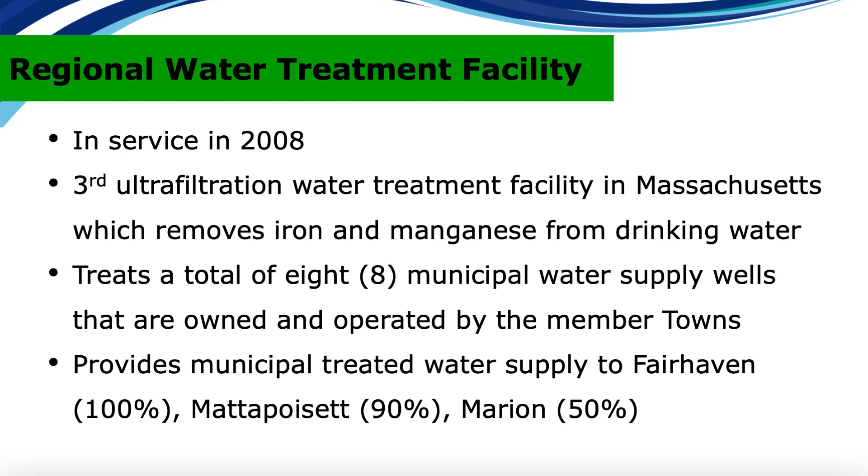It's actually the 3rd ultrafiltration water treatment facility in Mass, and the ultrafiltration system removes iron and manganese from the water. There's a total of 8 municipal wells that are owned by the respective towns. Fairhaven owns 4, Mattapoisett owns 3, Marion owns 1, which they share with Rochester. 100% of Fairhaven's public water comes from the district water treatment plant, 90% of Mattapoisett's, and about 50% of Marion's.

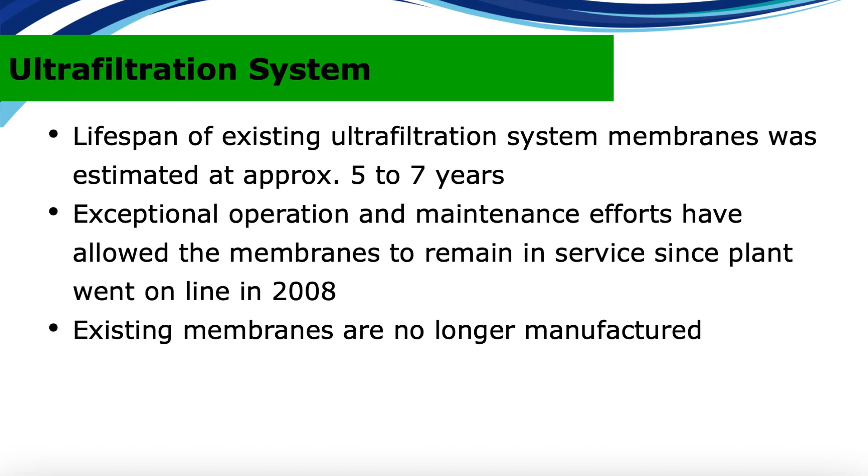The current ultrafiltration system lifespan is approximated to be 5 to 7 years. Through exceptional operation and maintenance efforts, the membranes at the plant have survived since the plant went online back in 2008. The existing membranes are no longer manufactured. As we have a state permit to withdraw the water, and they don't make the filtration system anymore, in order to change the filtration system at all, we had to get state approval. In order to get state approval, we had to have a pilot study done and duplicate the full-scale operation, which we did with a new system.

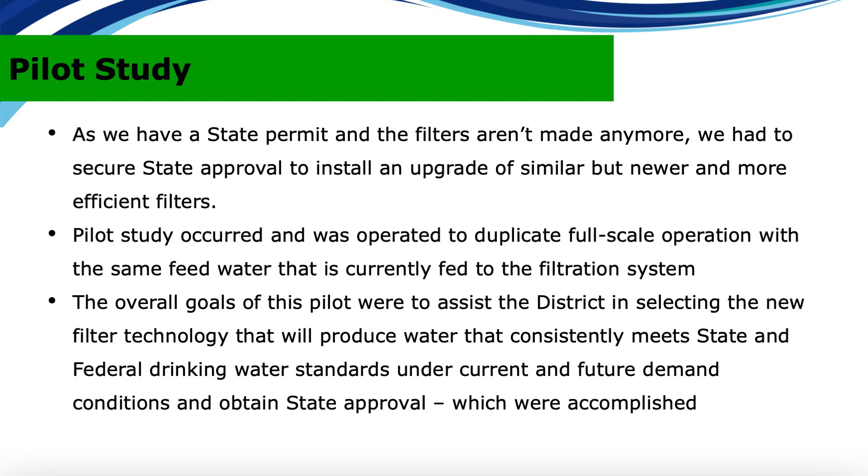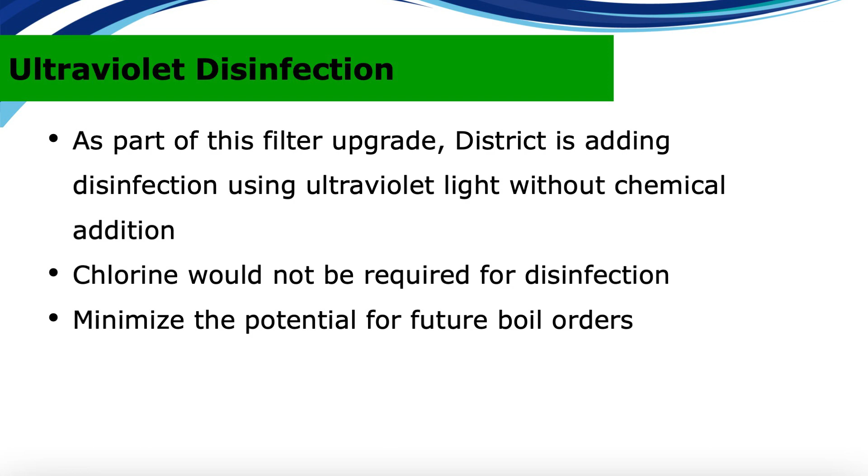With the district obtaining state approval for the new filter technology, as well as approval for the disinfection addition, the next step was to secure funding at the 3 respective district member town meetings, and that took place back in 2022. The total budget is estimated to be $7.2 million. The capital cost by town based on consumption: Fairhaven's allocation is just shy of $4.2 million, Mattapoisett's $2.3, Marion's a little bit over $700,000.

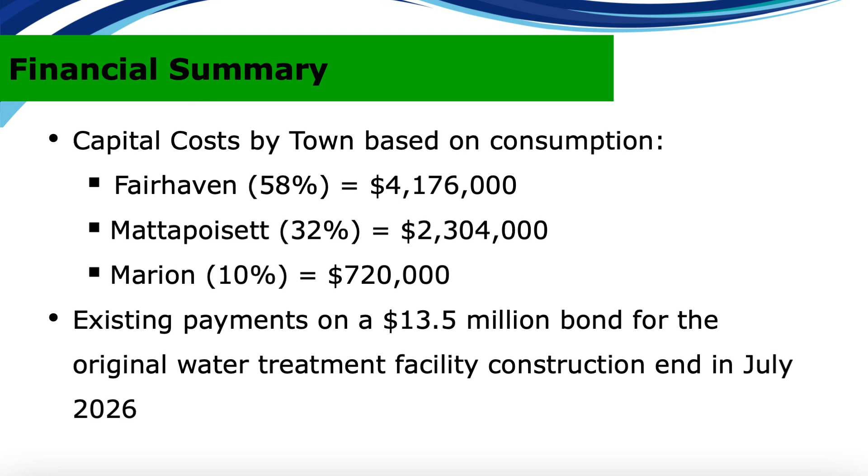Again, the water is safe, but due to the filter lifespan and the fact that the state, ever since the boil, requires us to add trace amounts of chlorine, any minimal turbulence results in the resuspension of particles, and that's what causes the water to be discolored sometimes. The iron and manganese, which is removed, is resuspended again at times.

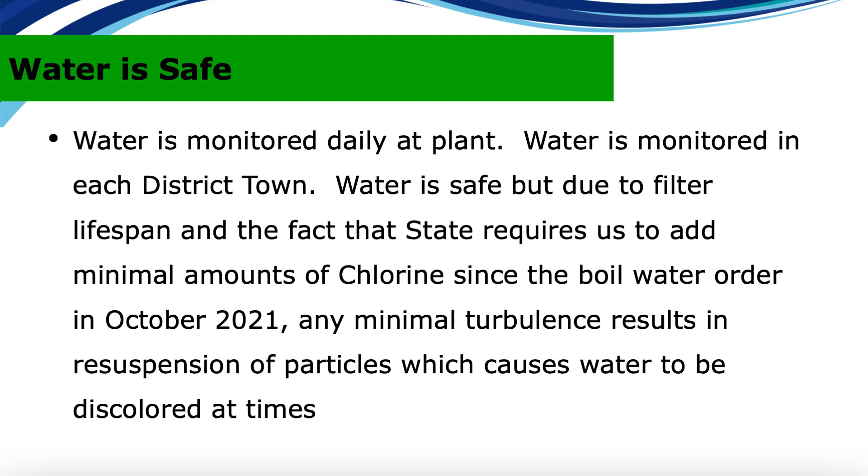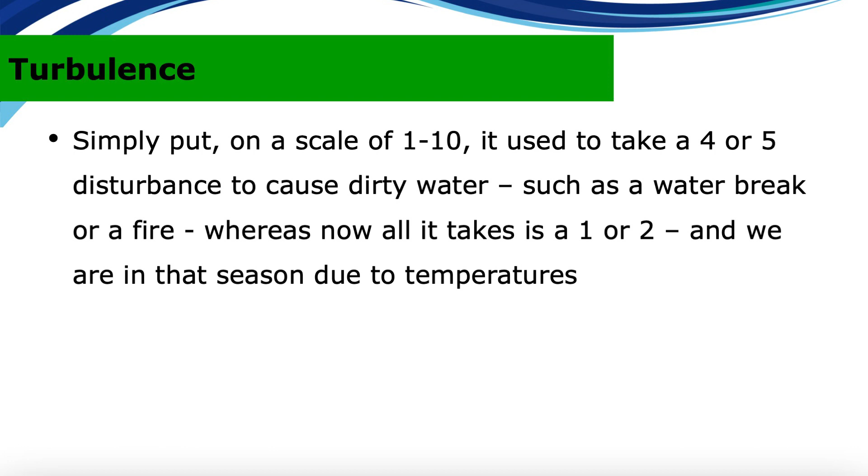Really simply put, on a scale of 1 to 10, it used to take a 4 or 5 to really shake things up to cause the resuspension. What are some of these things that would happen? Water main break, fire. Now it only takes a much smaller disturbance, a 1 or a 2, and we're certainly in that season right now due to the temperatures.

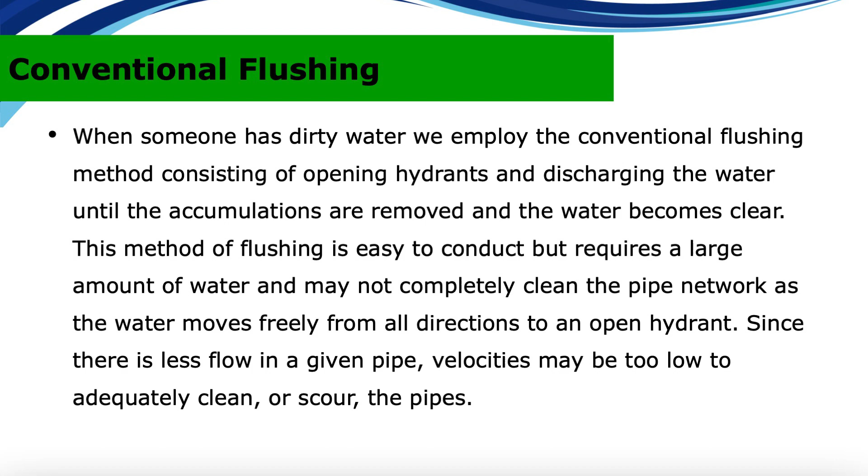When someone has dirty water, we respond via conventional flushing. A crew member will open a hydrant and discharge the water until the accumulations are removed and the water becomes clear. This method of flushing is very easy to do, but it doesn't always completely clean the pipe, as although the water's clean, some of the sediment remains behind in the pipe.

As a result, a standard industry practice is what's called unidirectional flushing. And what unidirectional flushing does is there's a lot of valving involved, and it forces the water in one way, very similar to a backwash.

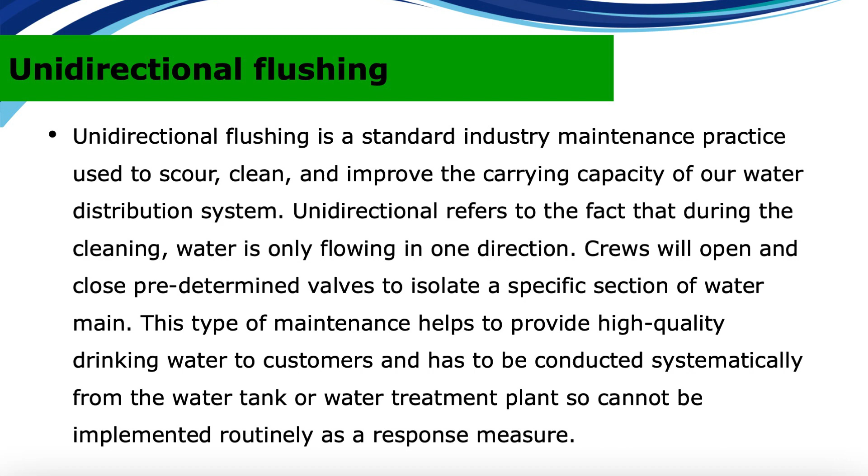And because of this effort, we cannot systematically do it routinely. We have to start at the water source, the water tank, and then move accordingly. It would be great if every time someone had dirty water we could do this, but we can't. So we need to get this done.

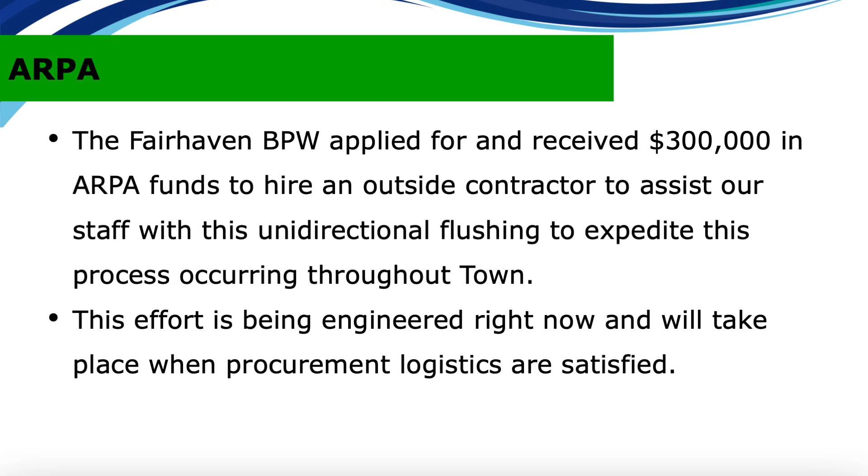Last November, the Fairhaven Board of Public Works applied for and fortunately received $300,000 in ARPA funds for us to hire an outside contractor to work with our crews to conduct this unidirectional flushing throughout the town. This effort is being engineered right now. We're going to be procuring, and we're hoping to begin this process, give or take, within a month or so.

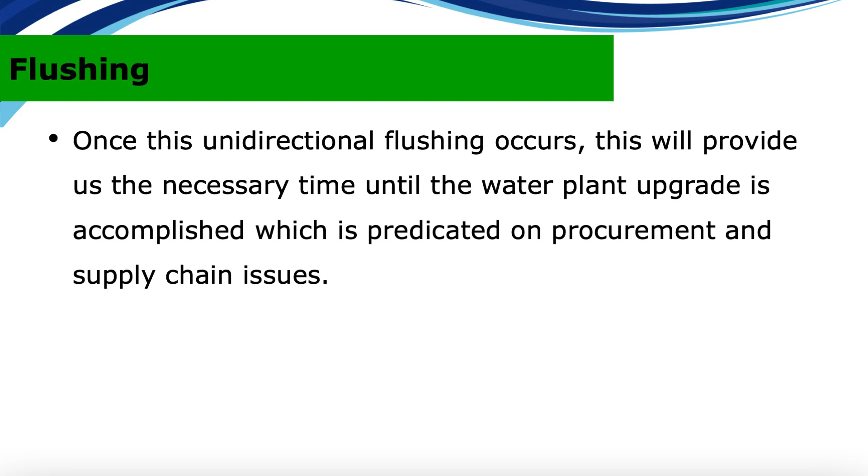Once this unidirectional flushing occurs, this will provide us the necessary time until the water plant upgrade is accomplished, which, although everything has been approved money-wise, again, at the respective town meetings, the upgrade is predicated on procurement and current supply chain issues. Some general information.

This past weekend, February 4 and 5, there was a contractor that was working for New Bedford on Pope's Island, and they severed their water line. As we have an intermunicipal agreement with the City of New Bedford, we agreed to supply them with water. With the extreme low temperatures Friday into Saturday, New Bedford had a few breaks in their water line on Pope's Island. This caused some of the aforementioned turbulence and yielded us dirty water in some sections of town.

In addition to what happened with New Bedford's line that we were feeding, it's very important to note that there were also, as far as we know, there could have been more, but there were 40 reported property pipe bursts, internal, nothing to do with the town, assumingly all temperature related, which certainly added to the dirty water situation on Sunday, because here is 40 additional areas where there was turbulence.

Just some general information about what's happened in recent times, and not to make an excuse at all, but just to provide information to the public. The gas company broke at least 20 of our water services where we had to go and repair these. And this was over a period of a couple of months. And of course, every time a water main is broken and we respond, there's turbulence.

Titleist, who was upgrading their internal water system, had a 10-inch water main break, and we lost hundreds of thousands of gallons of water, again, causing turbulence throughout the town. There was a decently sized fire a couple of weeks ago on Brandt Island Road, which caused people in East Fairhaven who never had dirty water before to get it.

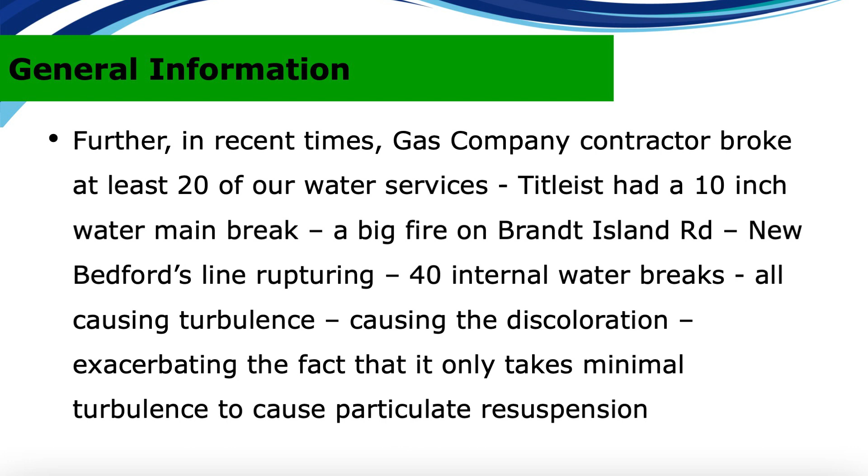New Bedford's line rupturing this past weekend, again, February 4-5, 40 internal water pipe breaks, all causing turbulence, all causing the discoloration, exacerbating the fact that it only takes a minimal turbulence to cause particulate resuspension.

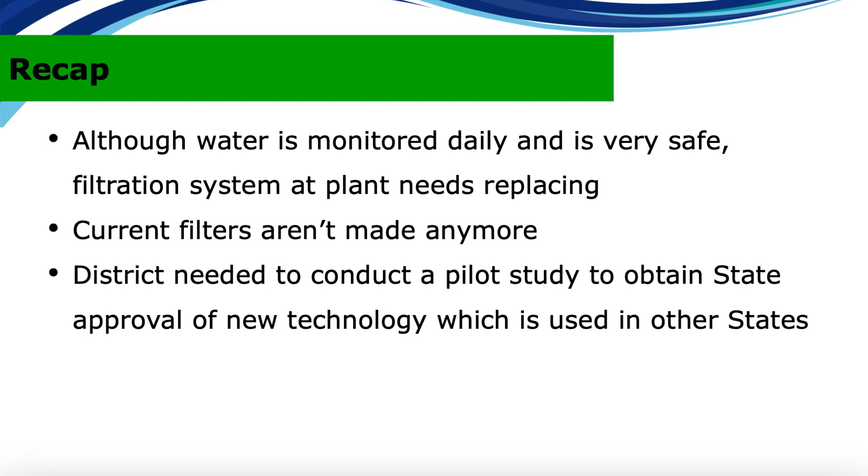So just as a general recap, the water is monitored daily and is very safe, but the filtration system at the plant needs replacing. They don't make the current filters anymore. So we needed to conduct a pilot study to obtain state approval of the new technology. It's new technology here, but it's not new technology as it's used in many other states.

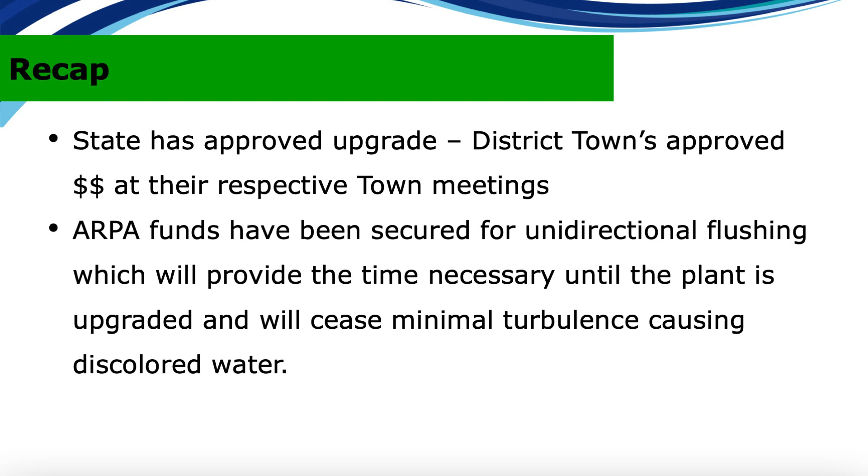The state approved the upgrade. The member district towns approved the money at their respective town meetings. ARPA funds have been secured for the unidirectional flushing that I mentioned before, and this should buy us the necessary time until the plant is upgraded and cause minimal dirty water moving forward.

If you get dirty water, please don't run your hot water. Run the water closest to your meter, which most likely is outside. Please call the water department. Folks get dirty water and we don't know about it because they don't call us. Do not dry or use bleach in your laundry if it's discolored. What you should do is use an iron-out product to remove the stains.